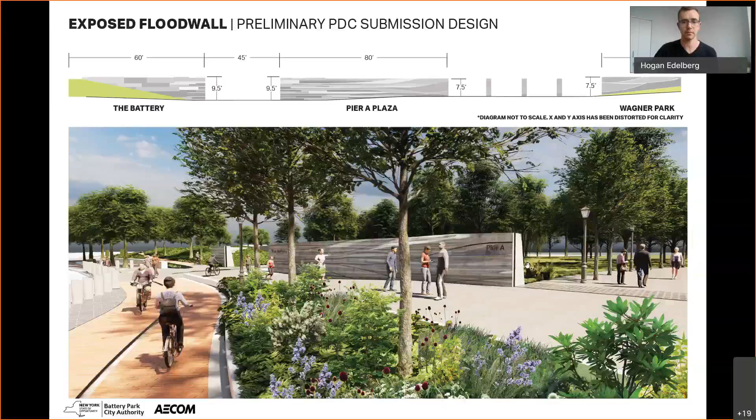The original concept is to take rougher and more textural and more building-block forms on the Battery side and weave that into a transition that expresses the change in place as you go from the Battery in the south to Wagner Park in the north. You can see in the image below how that starts to be expressed in a range of textures and colors and stone types to create something which is very interactive and helps to humanize this piece of flood infrastructure.

So looking at this area in plan, the flood wall is really an element that can serve to connect these three spaces, the Battery, Pier A Plaza, and Wagner Park. And as a design driver, this has been something that the team has been focused on for quite some time.

In plan overlaid with our current site plan, the flood wall is shown in blue. Areas where you see a dashed line, it is either buried or will be flush with the ground plane, as is in the case in Pier A Plaza, where we have flip gates. We're showing this again today to illustrate that it really is something that runs through every site in the southern part of the project.

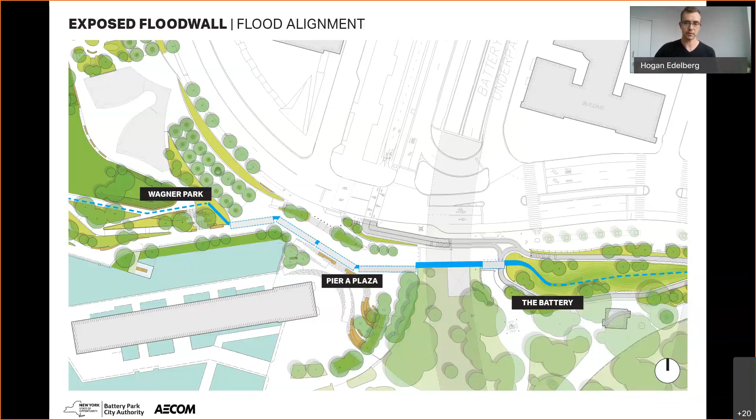The way that we can achieve this unification through the design is by looking at the cladding of the flood wall, which is what is going to be exposed, in the darker blue.

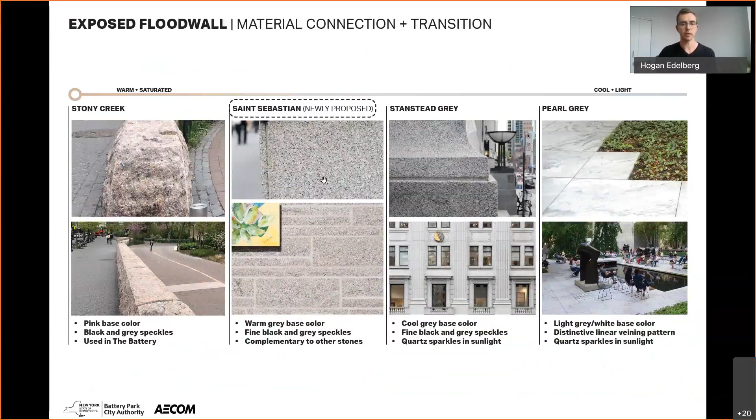Some of you have seen this before, but we have been looking at a palette of stone to clad the flood wall that relates both to the warm and saturated colors that exist in the Stony Creek stone in the Battery today, but also relate and are able to create a transition to the pearl gray, which will be used in Wagner Park in the proposed design.

We have some descriptions here of some of the qualities of these stones that we really are picking up on. The Stony Creek, which is prevalent in the Battery today, has this strong pink-based color and a mixture of black and gray speckles. It's used very widely in the Battery.

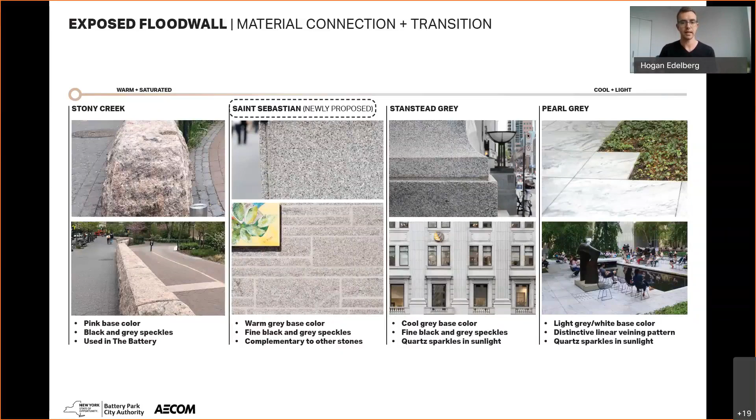A new stone we're considering as part of these two new concepts for the cladding of the flood wall is St. Sebastian, which is a granite that picks up both on the warm colors of the Stony Creek, but also starts to relate to the lighter and cooler tones you see in the Stanstead gray and the pearl gray as you travel north. So this gives us a palette going from warmer to cooler, from heavier to lighter, that we can use to articulate this piece of flood infrastructure and create the transition. I'll share in a second a couple of different ways we can achieve that.

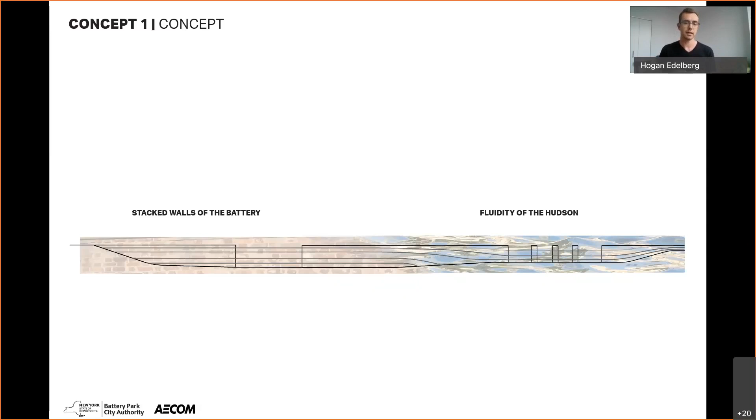How that may be applied to the wall: moving from left in the Battery to right in Wagner Park, you start to overlay this granular texture of the stacked stone walls and that roughness and color, and pull that over as a transition to Pier A Plaza, where you start to pick up a bit more on the more linear elements of movement and light that you can get in water.

So what we're talking about here is looking at a transition from the Stony Creek and the St. Sebastian on the left to the pearl gray on the right. The Stony Creek and St. Sebastian becomes our stacked stone, and the pearl gray becomes our Hudson River.

Before going into each section in detail, I'd like to show you the overall elevation of what this will look like as if you were standing along Battery Place and looking towards the water. On the left, we have the Battery berm, and don't worry, I'll zoom in and go through this in much more detail. The Battery berm is going to be concealed behind these street trees, and we have the Stony Creek granite in the foreground.

The Battery wall, just where my mouse is now, actually comes into the foreground as it emerges from the Battery berm, where we have the entrance more or less aligned with the memorial in the background. Then moving to the north, we have our largest section of exposed wall, directly over the Battery underpass, where we have a slope up to the raised Pier A Plaza. There we have new tree planting and our low walls in the foreground, creating a continuous security barrier to protect against any vehicular threats.

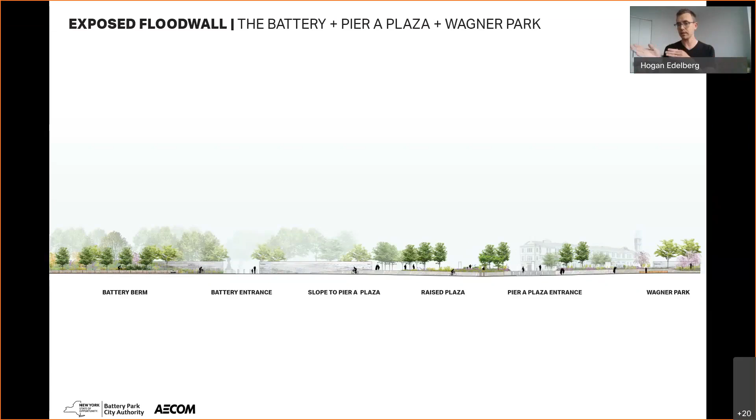In this first concept, what we're really seeing is this transition from the rougher split-faced stacked stone that speaks to the vernacular of the battery, moving from more rectilinear veneer pieces derived from the proportions of the existing Stony Creek blocks on site today, to more linear and fluid pieces of veneer cladding as we transition across the flood wall from the battery into Pier A.

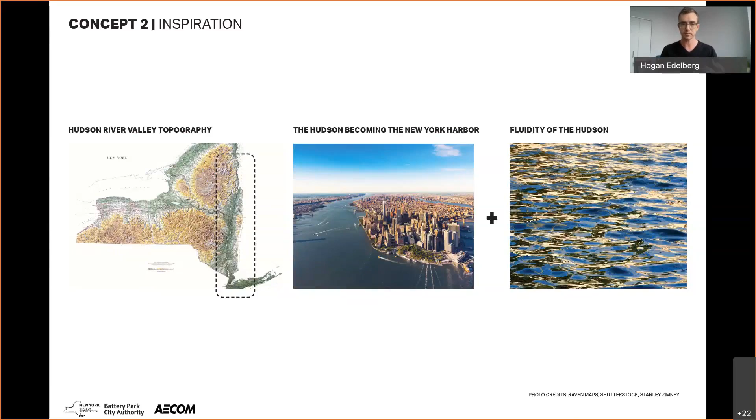We wanted to recognize the very strategic importance of the Battery and its location where the Hudson River really becomes a New York harbor. Reflecting its relationship with the Hudson River Valley and with water, we can start to imagine that this idea of topography in a map can actually be transcribed on the wall itself, creating a narrative and place-based storytelling as you view this wall, visit the Battery, or travel along the bikeway.

So what we've done in this concept is take the topography of the Hudson River Valley and assign different sequences to that, and assign stone types to these different elevations. We have warmer stones reflecting our higher elevations, down to lighter stones which reflect our lower elevations and also our water. In addition to telling this interesting story about the Battery, Manhattan, and the Hudson River Valley, it can also still achieve this idea of transition from rougher and warmer textures in the Battery to lighter and smoother textures in Wagner Park.

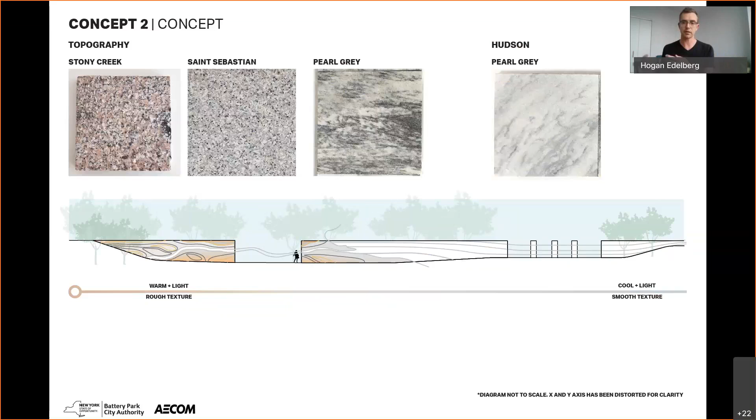So what does that start to look like in reality? We zoom in a little bit farther here too, but what that does is it makes the Battery wall, as it is exposed from the Battery berm, tell the story of the Hudson River Valley.

And as you cross the Battery entrance, this is transcribed on the Battery Pier A wall. We have the island of Manhattan located right here, and then the water flowing out into the New York harbor from this valley on the remainder of the wall.

Again, this is an idea of transition, and exactly where this happens on the wall can be adjusted. But it really strengthens that relationship to the Stony Creek granite blocks that are out there today by extending the horizontal idea of land across this wall, and in a way helps reflect the changing relationship of the Battery with water, especially salient because of the function of this wall at the end of the day.

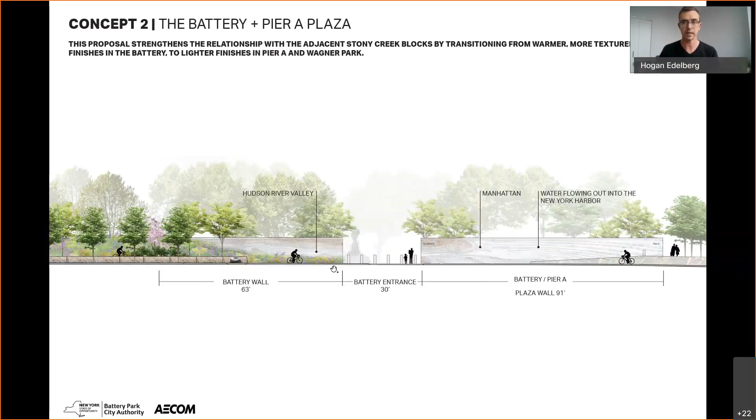So that would change our finish strategy a little bit, where we play up this idea of land as layers, using either CNC routed or water jet stone in a veneer pattern to apply this idea of topography to the wall on the left.

Moving over to the right, we still use extrusions to express the ripples, where we have the water flowing out of the Hudson River Valley. We can explore how to accentuate that texture and make this as dynamic as possible. Again, on the bottom, we have a key plan showing how that might be expressed on the wall itself. You can see very clearly how the Hudson River extends all the way through this.

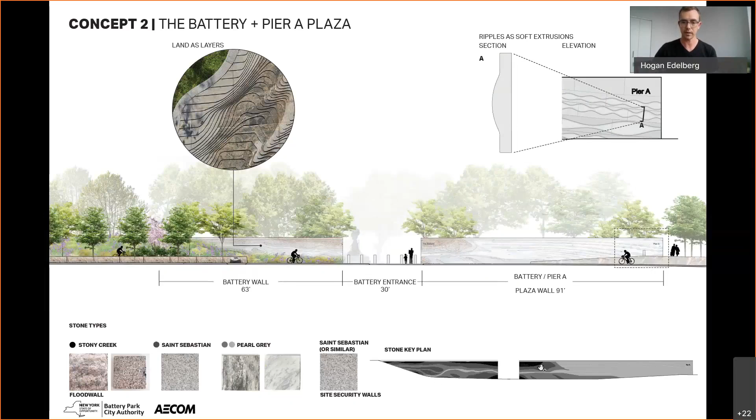Zooming in a little bit more, how does this stack up against the scale of the Stony Creek blocks and the scale of the Battery berm itself? This is a 63-foot section of the wall, which is going to be coming towards you as it emerges from the Battery berm.

You really do get something that can be interesting as you move along it, interesting as you look at it from across the street, but also interesting as you walk up to it. It can start to tell a story of the place that you're visiting, and also the function of this wall itself. This idea of the transition from land to water can be a helpful element to interpret the Battery and also this flood wall.

And what does that start to look like in perspective? It's something like this, where the gradient of warmer to cooler still happens from south to north, but also starts to happen from top to bottom and vice versa, where the idea of the Hudson River Valley extends all the way across the wall, even as it snakes into the background and dives into the battery berm.

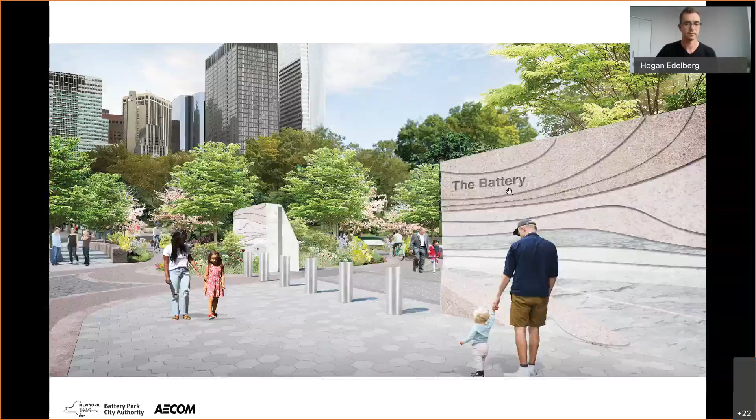And stepping back a little bit, the kind of tactile nature of this becomes even more apparent. And the warmth that comes from reflecting this idea of topography and land with Stony Creek or St. Sebastian is something that really catches your eye as you stand back and becomes something of a wayfinding element, and kind of a marker in place that helps define the entrance to the battery.

So you've seen some ideas for these columns before. We took a pass at these again just to ensure that the way these are being detailed achieves a couple of different things. One is that it really relates to this idea of movement and of water as we've expressed it in the kind of major pieces of the flood wall to the south. So we've articulated the horizontal jointing of these to create something that is a little bit more playful.

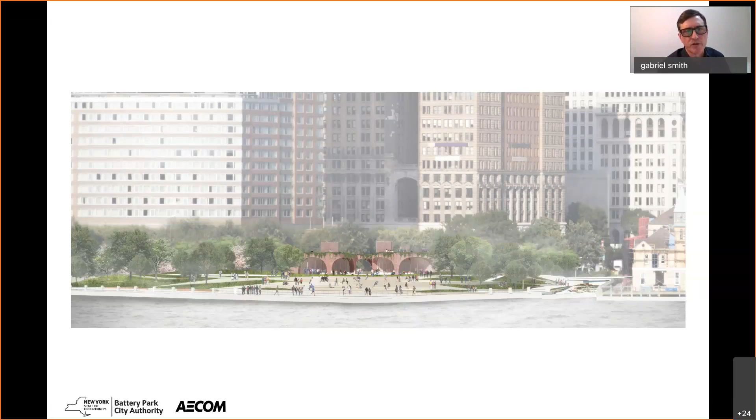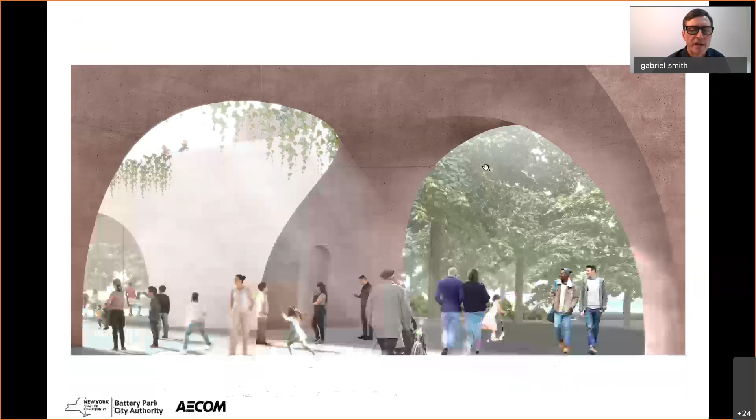I'm sorry, Gabriel, to interrupt you. Forgive me. Would you be able to, I think a lot of folks who weren't here to see the original presentation in January would really benefit, and even those of us who were, with a little more fleshing out of what exactly is going on in each of these areas, and maybe a little bit more time on each slide, because it's a lot to take in. Yeah, just a little more description of what we're looking at, the north roof deck and the south, and if you could incorporate the sustainable resiliency part of it. I assume that's part of this.

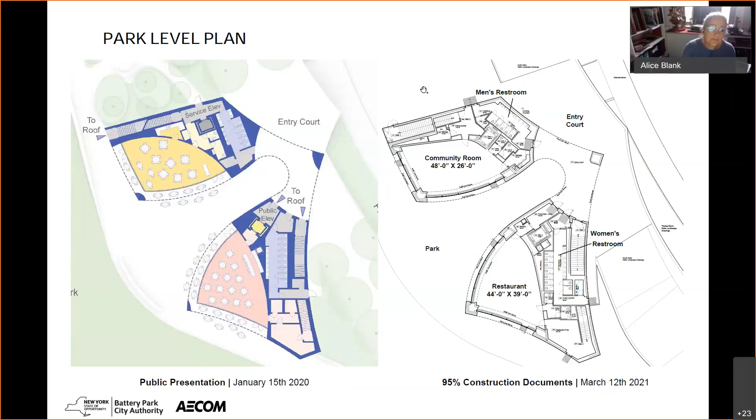Until the alignment is completed, the building needs to be flood-proofed, which we've done with some temporary removable stop logs on the service entry side in case of a flood. But we decided not to both take valuable service space needing direct access off Battery Place, and also to protect that equipment, by putting it up on the mezzanine.

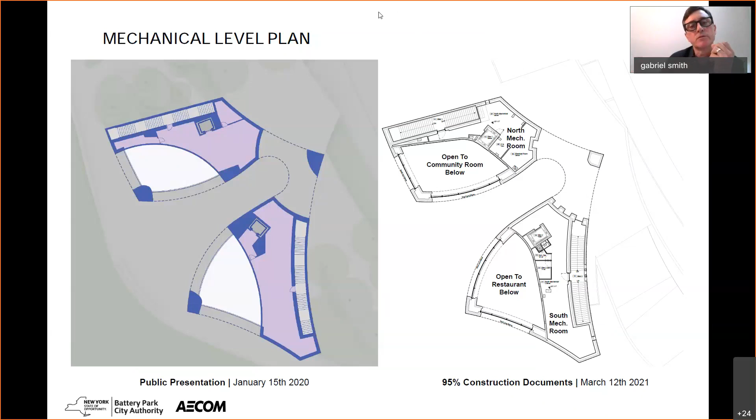So moving to the roof.

So I think we covered a lot of the features here. Again, this is the place where we have these renewables. The elevator overruns come up and allow public to move in and out of the building for events. There's obviously two stairs here that serve primarily for egress, but also gracious enough to serve for getting up and down as well.

Any questions about the roof? Could you just describe what the renewables are, and what are they doing for the building? How much of what is this? Could you just give us a little more?

I think I need to let AECOM weigh in on that more specifically, but what they are doing is trying to offset one of the big energy consumers, which is hot water for the restaurant. Obviously, we're working closely with Battery Park City Authority on the tenant guidelines for that operation. But one of the big things that we found challenging is just the amount of hot water being generated for their operations as we project out with our food service consultant.

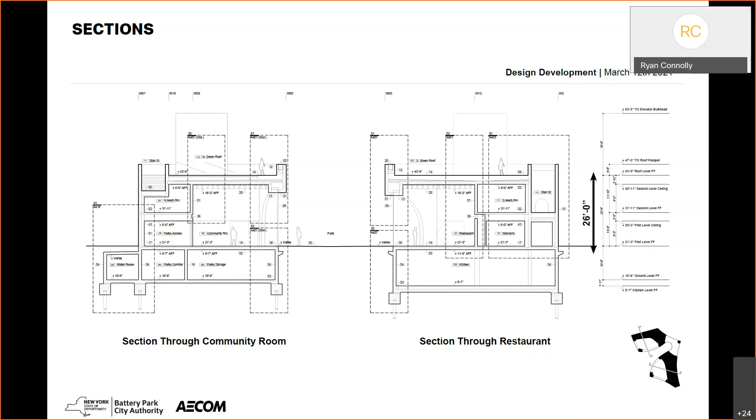use of a double wall system that allows us to have a continuous thermal envelope to help mitigate any potential thermal bridging and to create a continuous, tight seal to the exterior. We're using this Thermomass system, which allows you to pour an outer concrete wall with the insulation and vapor barrier, and then an inner structural concrete wall.

So one of the things I think is exciting about this is the way in which it really elevates the ability for this building to be long-term high performance and have a life cycle that's maybe much longer than the normal building. So, I think unfortunately one of the things we discovered when we did a survey of the existing building is that it's really suffered with the marine environment that it's in. And so what this Thermomass system does, and it's kind of a product that's very unique, it actually encapsulates the insulation.

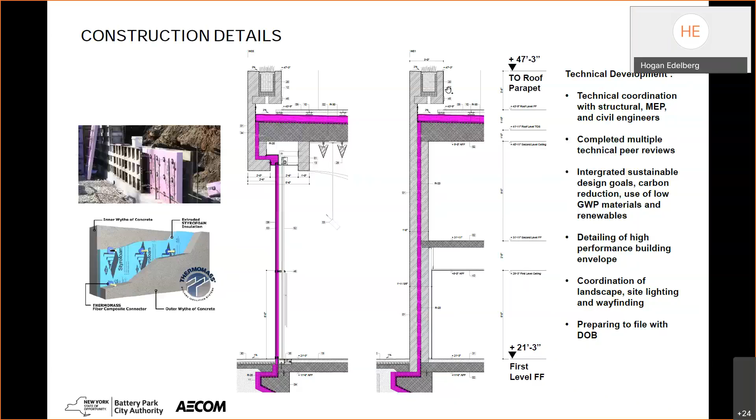Gabe, I switched back to the details slide because I heard you were still talking to it, but we can. Yeah, if you don't mind advancing and just letting me know where you are, I can kind of pick it up from there.

Okay, so just before you move on, a couple of quick things to make sure it's clear. There was a reference to a basement, but there is no basement on the project. I believe, Ryan, you were referring to the street level. Because we've essentially raised up the park and slid the building underneath it, that's actually our street level, our public level, and is the lawn level. So in terms of terminology, ground is actually lawn level, which is the public level, and then the street level is the back of house level.

Gabe also made reference to the deployable floodproofing at the entrance, and that's not protecting against these big storm events, which is what the primary flood wall is doing. It's more of a tertiary level protective measure against any sheet water flow on the streets. Our coastal modeling has shown we're not going to be experiencing that around Battery Place, but we have a protective backup measure in preparation for very large storm events, just to make sure we're protecting the entrance to the back of house areas at street level.

Thanks, Gabe. Sure. Okay, so Hogan, if you don't mind advancing to the site plan that's part of this accessibility discussion. Sure.

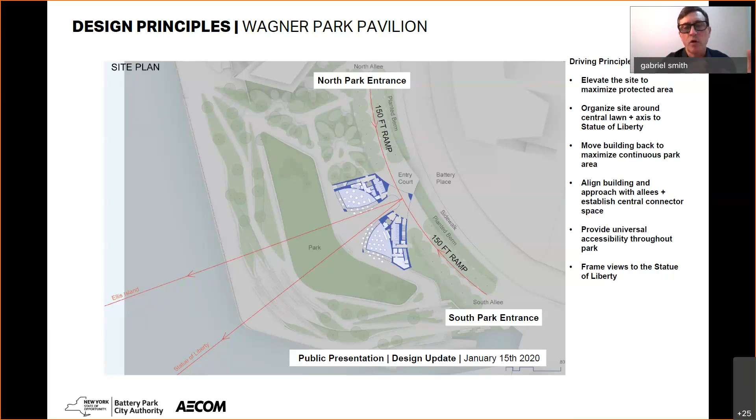Obviously maximizing the protected recreational area is important, organizing the site around this lawn and central axis with these incredible views, which you have now, and we absolutely want to preserve that legacy from the original design. Aligning the building with the approach to the park and these allees being elevated is all part of both weaving the legacy of the project and trying to get as close to the spirit of universal access as we can possibly get. That's really what we've been doing the whole time with the building in its different iterations.

Okay, next. So taking a step back, look at one of the earliest designs here. This was a public presentation that really was, for us, a watershed moment because it really unlocked our responsibility to try to deal with universal access.

In this scheme, we had a grand stair that went from Battery Place up into the park, where you then got great views to the river. This had an elevator on each allee that served the park level - one was for the restaurant and one was a public elevator that got you up so you could circumvent the stairs if you needed.

One of the important feedbacks we got in that meeting was, hey, this isn't really universally accessible - it sort of relegates people who are in a wheelchair or mobility impaired to use these elevators. Specifically, there was discussion about a ramp, and also a lot of discussion about the current stock of elevators and how maintenance has been difficult. So we took that away, and you can go to the next slide.

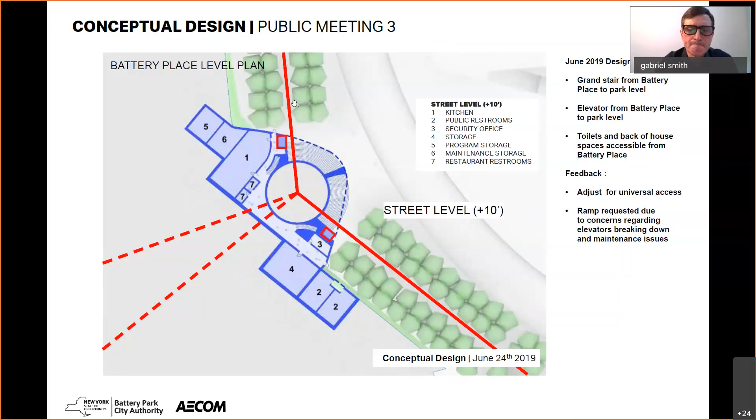So if you could go to the current plan, I'll try to talk through the design update of January 15th, 2020, and some important things that happened once that berm got — once the ramps got sloped along the berm.

At this point in the design, all the toilets and public spaces were relocated to the lawn level, and the back of house spaces were all at the Battery Place level. We eliminated the isolated elevator lobby at Battery Place, so there weren't any blind conditions that might be dangerous. We reviewed the universal access with the Mayor's Office for People with Disabilities, who determined that the ramping was in fact a good solution, providing universal access, and that the third elevator wasn't needed at that time.

It's important to say that when you read through the ADA, it's not just what they're saying you can do, it's also what they're saying you must do. In the case of ADAAG, what they're saying is that universally accessible routes have to be connected with the more common path of travel.

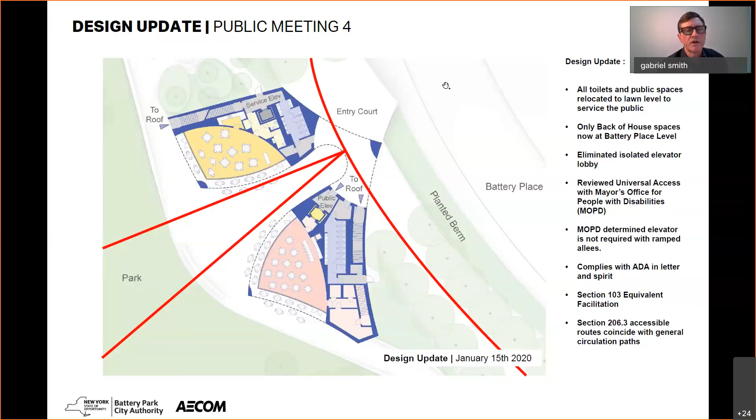So what we did in response to that was we actually studied a couple of different options. Hogan, I'm going to trouble you to go to the plan, because I believe the lower level plan of this really is just a description of what I've already gone through. But I'd like for you to go to the plan where we've overlaid two possible ways to access the existing elevators.

This is Gwen Dawson. Can you hear me? Yeah.

I just wanted to add that, as we've said before, our team has designed according to the ADA and all regulatory requirements for accessibility, and have come to a solution to a number of different conflicting sets of conditions and issues that do meet all requirements and provide a beautiful access point that's fully accessible at both ends of the park.

And what they're about to show you now is not in the way of current options. It's to show what the obstacles are and the conflicts are, and why the authority, with the aid of our design team, have come to the conclusions regarding the design and the accessibility measures for the design. So I'll let them go through this with you.

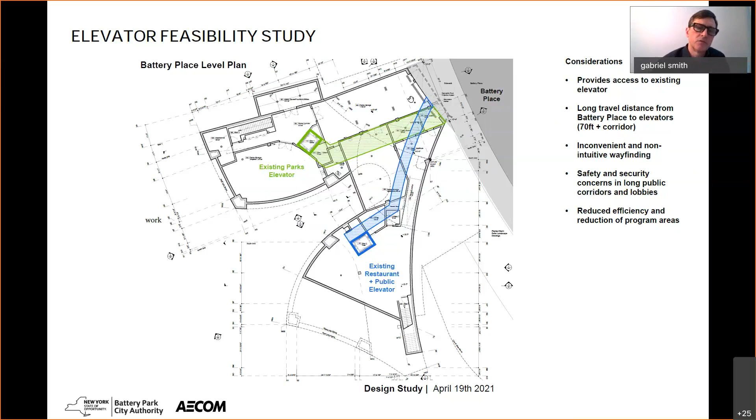So we have another study, and we can talk about these. I just want to go through them before we get into discussion. The other study, Hudson, if you could go to your drawing that you created. Yeah, I have these up.

The other options we looked at were one or more of these: to put a site elevator out near the berm, which would be highly visible on Battery Place. It would have minimal impact on the internal planning of the pavilion, and would probably eliminate most of the safety concerns that you have.

You would still have some concerns that you would normally find with a public elevator everywhere, and they're all over the city, including several at Battery Park City Authority. So the cons are additional cost and some increased operation and maintenance concerns.

We wanted to study these as well because they're more intuitive in terms of what you're trying to achieve and what we talked about in February about increasing accessibility to the park. So those are the studies we did, and we want to open it up to conversation about what the pros and cons are here.

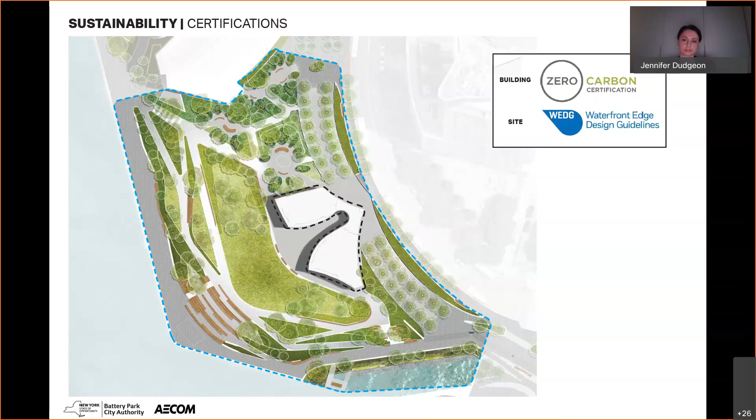I'll talk a lot more about that in the following slides, but while the ILFI is well known for its meaningful and rigorous sustainability certifications, like you may have heard of Living Building Challenge, ILFI zero carbon is actually the first performance-based carbon standard of its kind, and we are really excited that this project has the opportunity to be an early adopter and really help push the industry forward. So while there are several site and building sustainability certifications out there, these two were chosen after a lot of review, primarily because of their close alignment with BPCA's sustainability plan.

Next slide, please. Just zooming out for a moment, it's important to note how sustainability is really at the core program and design of this entire project, and that the Pavilion building is very much integrated in this site through its sustainability goals and features. So the building, as I mentioned, will be a net zero carbon building.

Achieving zero carbon is really the culmination of many building strategies, starting with energy efficiency. An example of that is we've implemented geothermal or ground source heat pump technology. We're also removing on-site natural gas consumption and using low carbon materials in construction, and then finally offsetting the remainder of any of the building's actual carbon footprint.

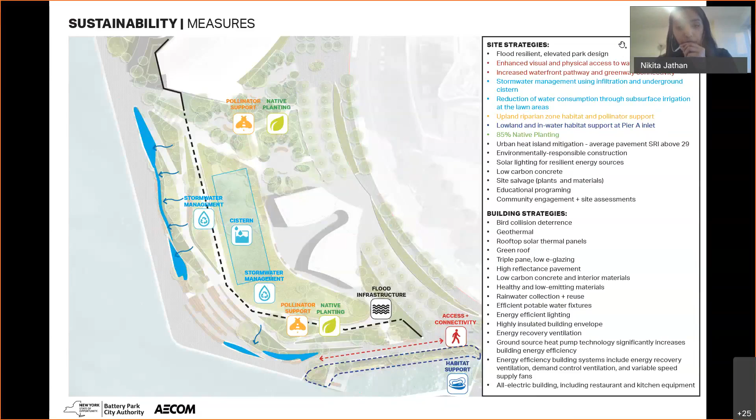Next slide, please. The building is also really inherently connected to its surrounding site. It's really a resilient site and landscape design that is managing stormwater, is flood resilient, collects rainwater for reuse, and conserves potable water use. And this is all really tied into the building's sustainability as well.

The site's attention to ecology and really an accessible, functional, and comfortable open outdoor space designed with attention to both rising sea levels and also rising temperatures is also, of course, key here. And again, very much connected to the building's intended programming, educational programming, and sustainability story.

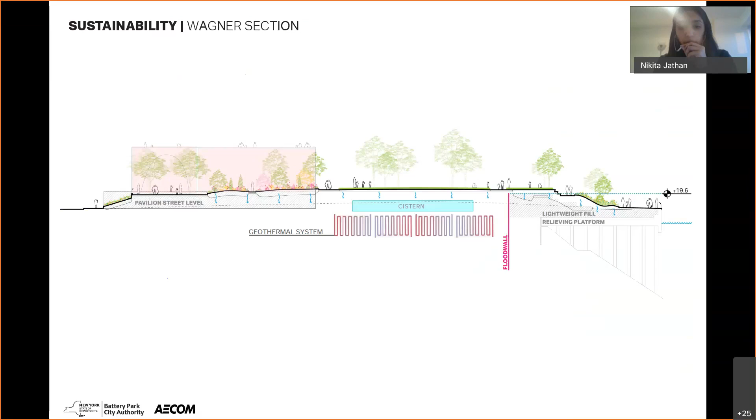Next slide, please. So the building's ILFI zero carbon certification was identified by our group as the most meaningful way to approach BPCA's commitment to a low carbon future, because it really addresses what can be thought of as both halves of the carbon picture of the building. So I'll talk a little bit about what that means.

First, it works to make the building as efficient as possible operationally and just simply use less energy. This is achieved through a variety of both passive and active design strategies. It's currently surpassing ILFI's 25% reduction target to an anticipated 38% reduction. And while this building is outside of the scope of carbon emissions legislation like New York City's Local Law 97, this reduction target puts the building in line with what that kind of legislation might require.

And in fact, it goes even further by actually offsetting all of the energy that will be used by the building. The other extremely important side of the carbon picture that's often left out is embodied carbon. ILFI zero carbon requires that the building document the embodied carbon of the whole building's elements, reduce that embodied carbon, and then offset it. So at this time, the project is far exceeding that requirement of 10% and is actually anticipating about a 37% reduction. And I'll go into a little bit more detail on that on the next slide.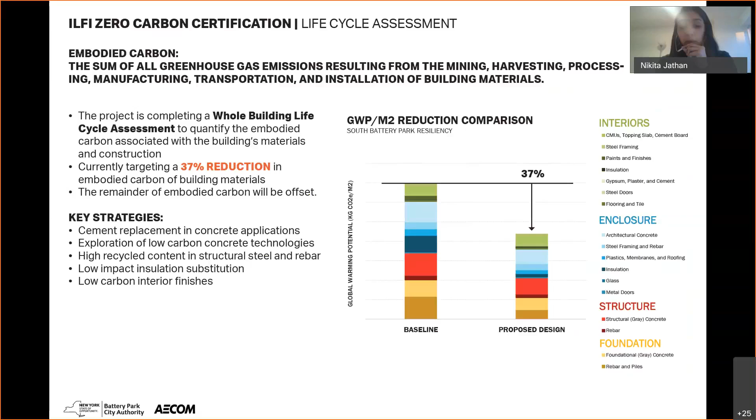We're replacing cement throughout concrete applications and using low carbon concrete, using high recycled content materials throughout, again, the building and the site, and using lower impact insulation materials, which can typically have some really harmful global warming potential. Next slide, please.

So I just want to end on this graphic. There's a lot in here, but this graphic really helps convey the holistic sustainability approach of the building. To get to a net zero building doesn't just take one or two strategies, but really a strategic approach across the entire design that balances all building goals.

So in addition to the carbon strategies I discussed in a little bit of detail, the building is really addressing best practices across the board, whether that's water conservation, sustainable site design, healthier materials, renewables, envelope design, and so on. Maybe just to conclude, I'll highlight a few examples of where I think you really see these synergistic strategies.

When you look at the interior spaces, daylight analysis has actually informed the design of these spaces to include things like operable shading and low emissivity glazing. All of this minimizes glare and solar heat gain while protecting valuable views, embracing daylight, and using less energy for lighting, helping us get to that zero carbon goal.

The building's systems use a whole variety of energy efficiency measures to use less energy. There's a whole laundry list of them. In particular, I want to highlight that there's a geothermal field below grade that will save a huge amount of energy for the building.

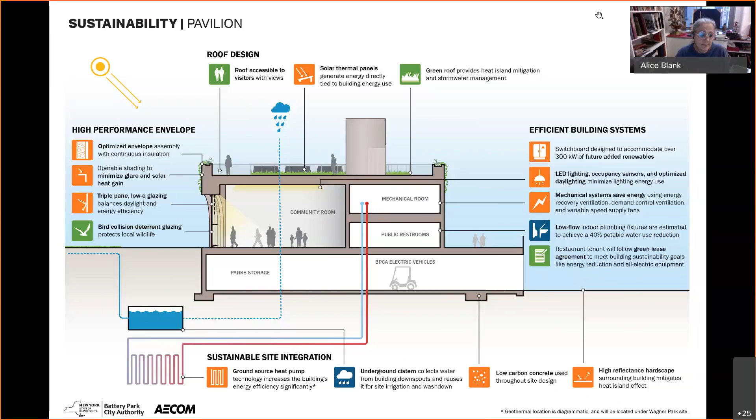I think that's the end of the presentation, Alice. Great, thanks very much, Gwen, and all the team. That's very helpful to hear from you.

So it's a good time to open it up for questions. What are we at, 7:30? This is the only thing on our agenda, so I hope everyone gets a chance to get whatever questions they may have answered and the clarity they need. Gwen, could you give us a little overview as to the timing on this project? What are the next steps in the approval process? If we could, what comes next here?

Yeah, I'm actually going to let Jenny answer that question because she's got all of those dates committed to memory, and I don't. Okay, great, thanks, Jenny.

Just make sure I'm unmuted. Can everyone hear me? Yes.

Yeah, so important just to qualify, for the Pavilion, Wagner Park, and the Museum of Jewish Heritage, they will be in construction, well, two construction packages actually, following a separate timeline to Pier A Plaza and the Battery. So very quickly, we're at 95% for the Pavilion, Wagner Park, and the Museum of Jewish Heritage areas.

We're looking at being at 100% for those documents in June. And looking at this stage, based on our EIS development, starting construction on those packages in early 2022.

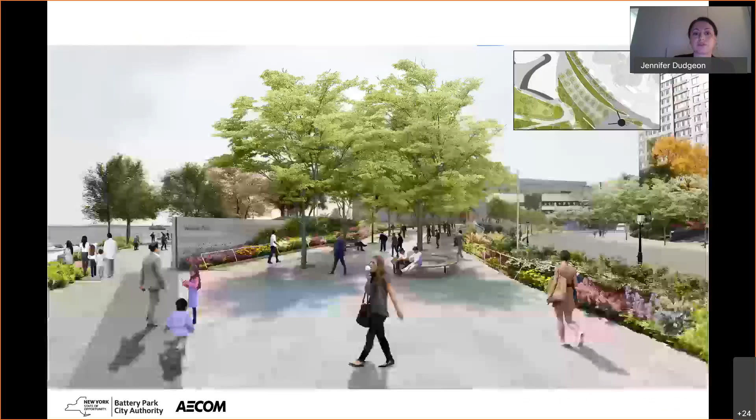This one here — we can see that essentially the knee wall on the left-hand side, as part of our physical site security barrier to stop vehicles, is framing up the bottom of the Wagner berm. So the alleys are ramping up on the left-hand side. This is essentially the experience you have on the street. As you move down Battery Place, you see the exposed section of stone wall as the ramp rises up to the lawn height and then tapers back down again.

The landscape team has worked to create a lot of visual interest in the planting palette along the extent of that. But it's important to note that this image will be part of the PDC submission, but really is just subject to the area to the right of that stone wall.

Thanks, Jennifer, that's helpful. That means there'll be no change, or they can't input on the plantings part — they're just talking about the stone wall part, is that right? They're actually just talking about the footpath. The stone wall is part of BPC land.

Okay, so I guess we're going to open this up to questions. We might be best to follow the way the presentations were provided, in terms of the flood wall, the columns, the Wagner Park Pavilion and such — but I don't think it really matters, and everyone will chime in with their expertise. So I open it up to the committee first for questions and comments.

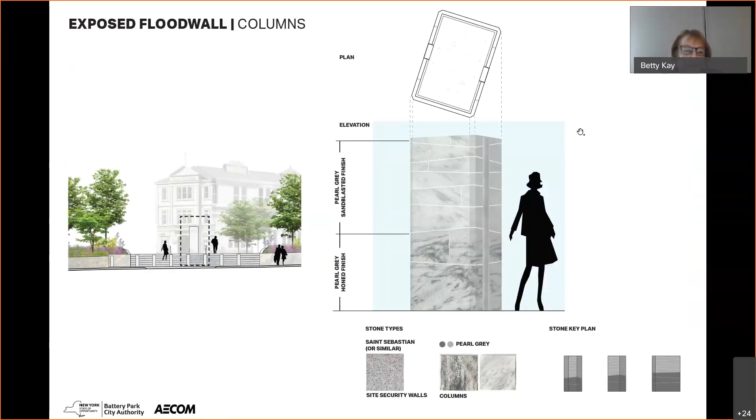Yes, thanks. I am a scooter user and I noticed a lot of stairs here. So if you could tell me a little more about this entrance, because obviously there are a lot of people with strollers and other things besides wheelchairs — how do they enter here? Sure. Hogan, do we have the plan view in this deck?

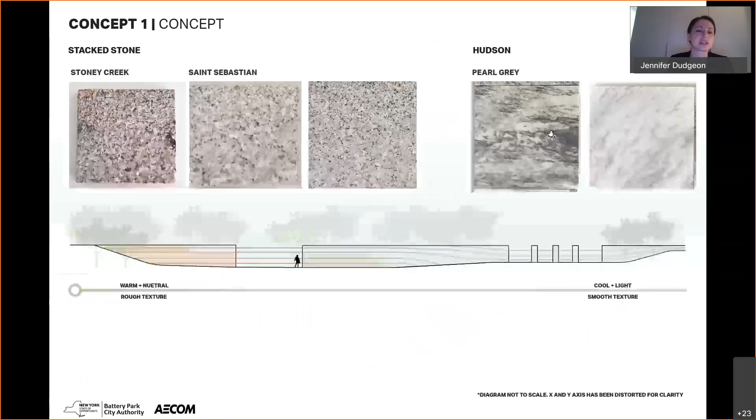So I'm just flipping back to see if we do. Yeah, so Betty Kay, we presented in more detail on Pier A Plaza at the last meeting on February 22nd, and there were plans that actually showed how we were dealing with accessibility.

This particular deck was really about the stone cladding of the flood wall. Maybe it's worth, we certainly send you a link to that past presentation. But maybe if we have enough time while we're talking about some other things, we can get that plan and that rendering to put on the screen.

And that's fine, sure. And I'd also just like to note, while we look for it, in this elevation that you can see from the street, the stairs are here in the center. Just to the left and just to the right are ramps as well, and they bring you to the same place that the stairs do.

Yeah, so I'll pull up a plan as well, but just we have that for now. Actually, can I just say, as a user, there need to be signs by the stairs because everyone gets dropped off there, and I'm used to going by myself. I can't go with anybody else in my group, but if there's at least signs so I know where to go, that would be helpful by stairs, and they could just be on the wall on either side.

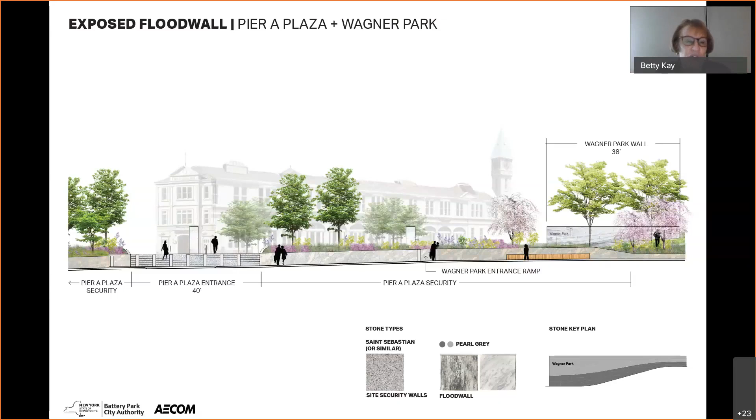Discreet. Sure, actually we did include a wayfinding plan, Hogan. I think it's at the beginning of the pavilion section. This one here, really difficult to read for you as well, Betty Kay, because it's zoomed right out. But I think what this plan was identifying, as we talked about in more detail last time, was that our primary arrival points to this project site are at the 9A intersection, and then also at the Museum of Jewish Heritage.

So when we're looking at how we're addressing wayfinding and understanding vehicular arrival, pedestrian arrival, and also public transport arrival, when you cross that intersection at 9A, there is actually going to be the Battery Park City wayfinding package, which is being constructed and installed at the moment, and we've continued the strategy for the wayfinding signage package into Wagner Park, Pier A Plaza. So you will be greeted with a pylon map at those two critical arrival points, which will help to orient you as to where to go.

Then they are supplemented with pole-mounted wayfinding signs as well, which will help with some additional directional guidance. So we've looked quite closely at that in tandem with our wayfinding consultants, and also in the context of the battery wayfinding system, because they do need to complement each other. And then the AECOM design team worked hard to make sure that intuitively a lot of the landscape features help guide you in the direction that the signage was leading you as well. So if we pull that plan up by the end of the meeting, it'd be good to quickly talk you through that flow again.

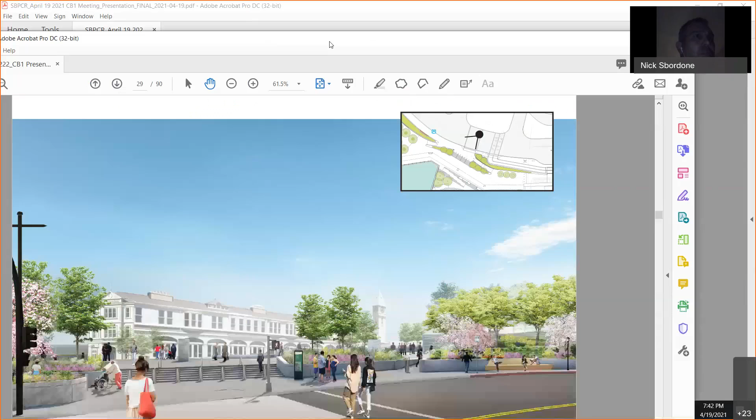Oh, here's a rendering. So here, Betty, go. This is the view. You're on the north side of Battery Place, crossing the 9A intersection. That is the set of stairs immediately in front of you that takes you up.

There is a similar one on the left as well. You can see the person with the wheelchair that then takes you up to the left side, up to the plaza as well. So both of those are flanking the immediate sides of the stairs.

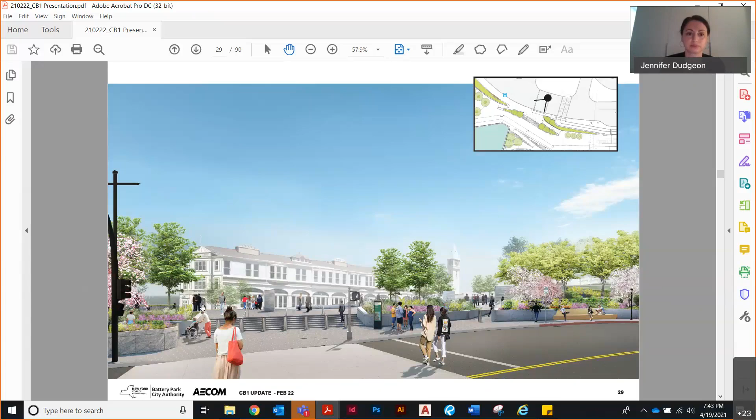Okay, thank you. So let's move on, on the exposed flood wall and the columns, do we have questions? I see Bob Schneck. Okay.

Sure. I just wanted to say that at the beginning of this meeting, Alice pointed out that CB1 has passed a number of resolutions. And as we pass those resolutions, often in meetings, people say, oh, I'll get back to you on that. Some of the questions we've asked over time are really important questions. Has anyone ever made a checklist of all the kinds of items in those resolutions and how they're resolved, and coming back to our meetings and talking about how each one is resolved?

In particular, three things hit me right off the top of my head. I was worried about skateboards, for example. Lots of times, wherever there's a serious incline, skateboards are going to find them and use them. And now people tend to use all kinds of electric vehicles, scooters and things everywhere on the sidewalk. And so now we have these very long ramps. In earlier meetings, people said they were going to consider those kinds of dangers on these ramps and how those vehicles would be accommodated. No reference to anything like that.

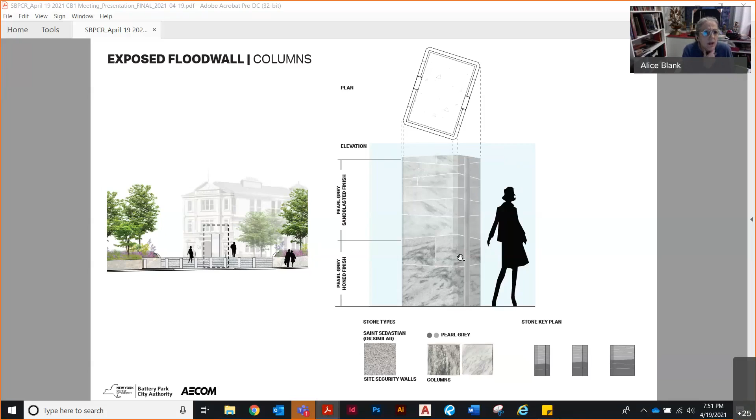I just want to add to Bob's questions about the bike situation. That came up many times — the idea of having a separate bike lane. Could you use the street? I'm not sure we heard about that tonight. Could you respond to where the bikes are going?

Let me provide an update. We had talked before about the prospect of a bike lane on Battery Place. We've had conversations with DOT, and they're willing to work with us if it's something the community supports for a bike lane on Battery Place. The proviso we were presented with was that it wouldn't just be that area — if they approved a bike lane for Battery Place, it would need to go all the way up to West Thames. There would be potential parking impacts.

And so we are certainly, as the authority, very willing to work with the community and with City DOT on trying to evaluate the prospect of a bike lane for Battery Place.

Well, that's great to hear, Gwen. Maybe we could arrange for something at the next meeting, this would of course be Betty Kay's domain. Let's talk about it, because I think it's an interesting concept, and it's all connected, bottom line.

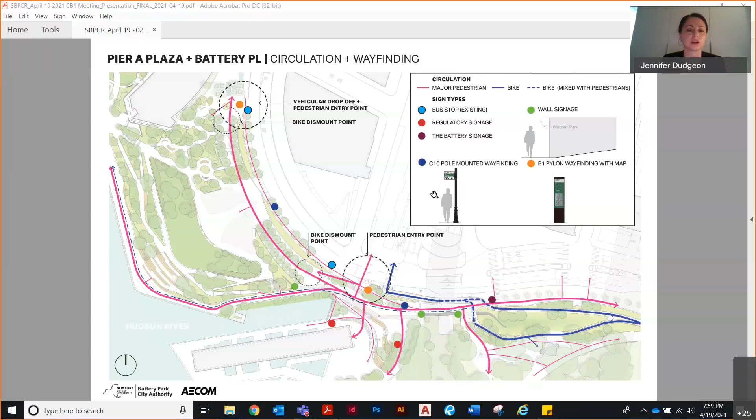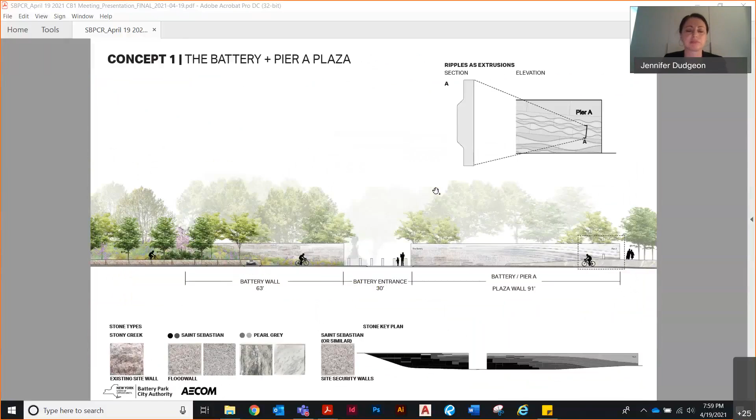Yeah, and maybe the overall elevation. I know this is a bit hard to... Okay, actually the plan, I'm sorry, I'm going to jump around, get you guys seasick. The plan that's actually showing Pier A Plaza with the walls in blue, that might be helpful.

So just recapping, essentially the flood barrier is the premise for this project. We've located this wall, and we've designed this wall, working with this community as well over the last couple of years, to address a 2050 1-in-100 year storm event. And what that means, when we've done extensive coastal modeling, is that for a storm of that type, the height of the water is going to get to roughly 18 feet in areas like Pier A Plaza, 18 feet above sea level.

You would have heard us use the term 'height of intervention,' so that's the height of the wall above grade. In a place like Pier A Plaza, for instance, where grade is around 6 or 7 feet, that ends up being like an 11 to 14-foot tall wall, depending on where you are.

So we certainly, as one of the primary design drivers through this whole process, have been very protective about public space, about making sure that we're not blocking access to public space and the experience of public space. And hence throughout the alignment, ranging from the museum all the way through to Wagner Park, across Pier A Plaza and into the Battery, it's always been about trying to minimize the exposure of that wall and maximize access to space.

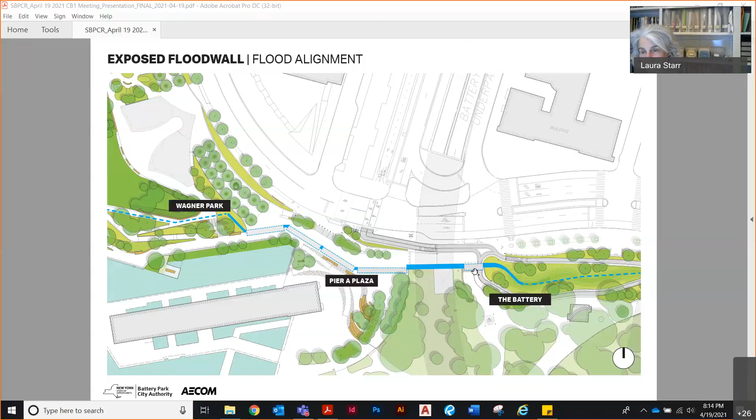Alice, I can't seem to raise my hand. This is Wendy, so you can come back to me later. No, go ahead, Wendy. Go right ahead, don't worry about that tonight.

I had a question about the wall, since you gave us the two renderings. The St. Sebastian granite, is that a special type of granite? Does it come from the Northeast? Where do you get it from? Is it just the color that meant something to you, or do any of these things come from New York State? I know it's a specific question, but I have more questions about the wall. The St. Sebastian just kept popping out as a very specific granite. Is it as specific as I was hearing?

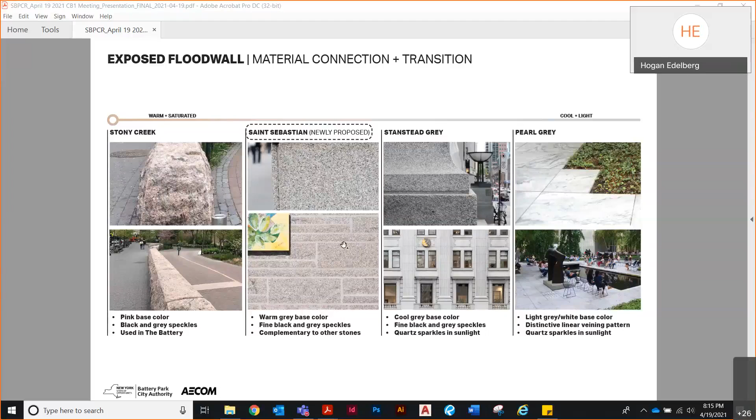This is a specific granite that we've located in quarries in the Northeast that is available in the quantities necessary for this project. It comes from the same quarries that the Stanstead Grey and the Pearl Grey stones do. I don't know the exact location of the quarry offhand, I apologize, but it is something we selected with availability and regional sourcing in mind.

Yeah, it's abundant and cheap.

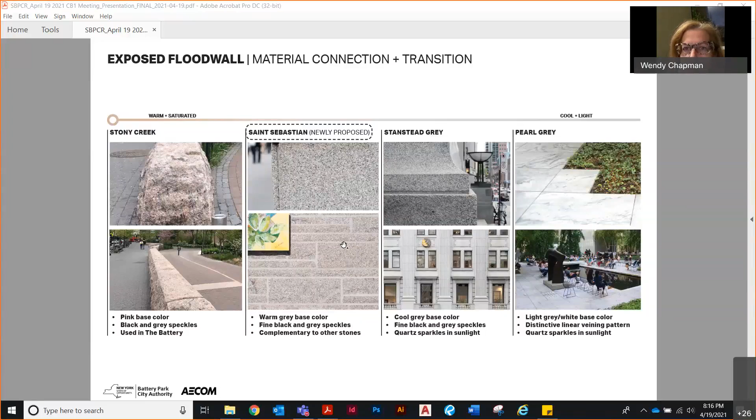Okay, well that sounds fine. I wanted to ask, I certainly prefer the idea of having something more specific with the map, the second version, which Warrie Price told us at one point - if you're going to show up and there's a wall there, she'd like it to be something a little more meaningful. It still seems very abstract, right? Is it going to actually say this is Manhattan and this is the Hudson, or is it just an abstract of it? It's not really a map, right? It's more of an essence of a map. Is that what I'm seeing?

That's correct. Yeah, that's correct.

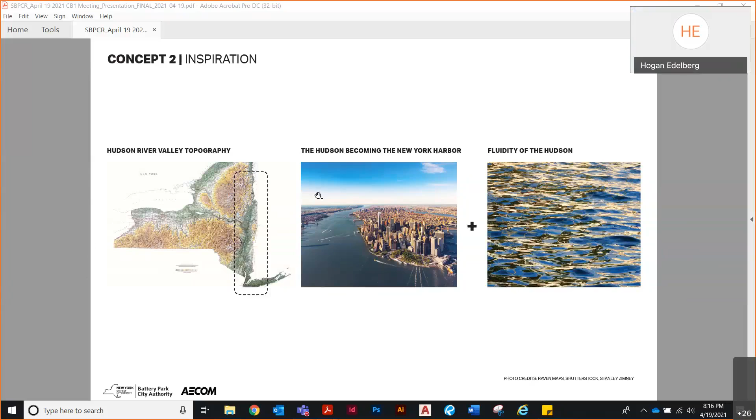Okay, so it's more abstract. I know that being blatant with maps is kind of out of style right now. I hope somewhere in the park there are more specific places where we can talk about the amazing topography and history. If that's not the place, maybe something else. How about - I think it's pretty...

In terms of the bike path currently, I just wanted to go back to that concept, and I know it's not our committee, but I think it's really important to note that the bike path as it is right now is so attractive that so many people walk on it, and it causes problems for the bikes. That's a separate issue for other committees to talk about later on.

And if I can indulge everyone a little longer on a slightly different topic - we didn't see an image of what the access of the garage door coming into the new facility looks like now, right? We didn't see the new one. Yeah, we did actually.

Perhaps Hogan, could you jump back to that page? We did skip over it, the detail of it. It was presented also on February 22nd. So if we could.

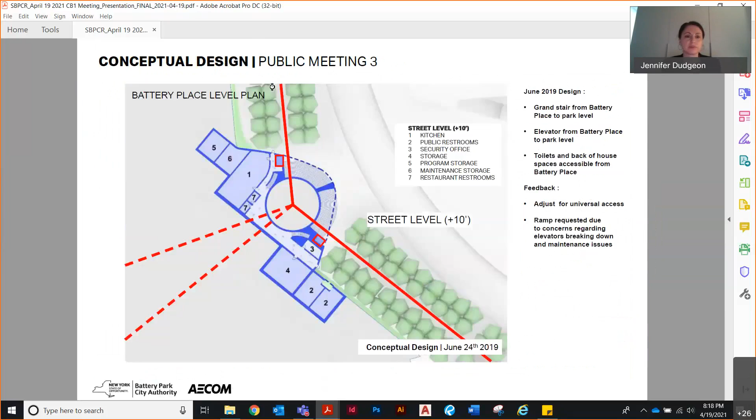Because you guys are showing this, but it's a lot coming very fast. Yes, no, it's a lot of information. We'll bring it up for you. See, now it's on the screen. It's hard to understand what I'm looking at. I don't see the plants. I don't see - that's not a street view. And listen, I'm struggling to...

No, you're absolutely right. And I will say that we had asked for architectural plans - first of all, we've gotten a few - and we had asked for perspectives of this particular location because it was so controversial, since you're looking into a service entrance from a city street and all the rest.

But that is the same, as you point out, that we saw the last time. It's quite tiny and very difficult to assess what it's really going to look like. I quite think frankly, that's a fair criticism. Yeah, if that's it, we can do better than that. Even if it's a service entrance, you can do better than that. That is not worthy of the spot. I don't know what it should be, but agreed 100%.

I am still so frustrated with this building, and I'm so excited about all the environmental parts of it, the cistern. There are so many great things, but the building itself is still missing something.

This is going to be a building that when we show up, I'm going to be frustrated. I understand you're 95% done, but I just want to say as a member, I feel like there has been a fail on this building, and it's close, but no cigar. This slide right now is a perfect example. It's not good enough. I don't know what it should be. I'm not a landscape architect or an architect, but I can tell you this is not good.

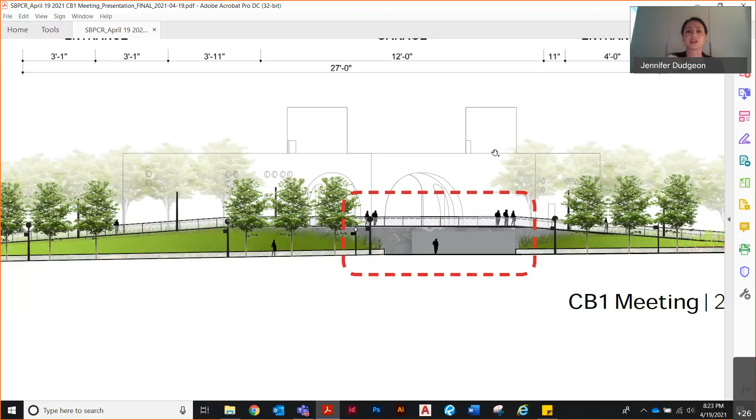If you pan up a little bit, Hogan. We were really trying to create a flush look with the doors, so in a metal finish that would blend with the stone and have it sit flush with the outer edge of the stone as well. So we tried to avoid a look that felt like a garage door. It just felt like a series of panels that blended in with the stone that were actually operable, so it should read like an element of the landscape.

I didn't tell you if it's going to look like the picture - it does not. You're not accomplishing what you're saying you're trying to. Could you put the stone facade stuff, or some facsimile of it, because you probably can't put stone on the doors and make it blend in, or come up with something that makes it blend in, because it really looks like garbage.

Yeah, we can take another look at that. If the intent is to really blend that out so we don't see the doors, we can work harder at the detailing. I get it's supposed to be the back door and back entrance, what people aren't going to see, but this is what the hotel is looking at, and what people driving into Battery Park City see as they come around that corner. This is our welcome into our community from that end.

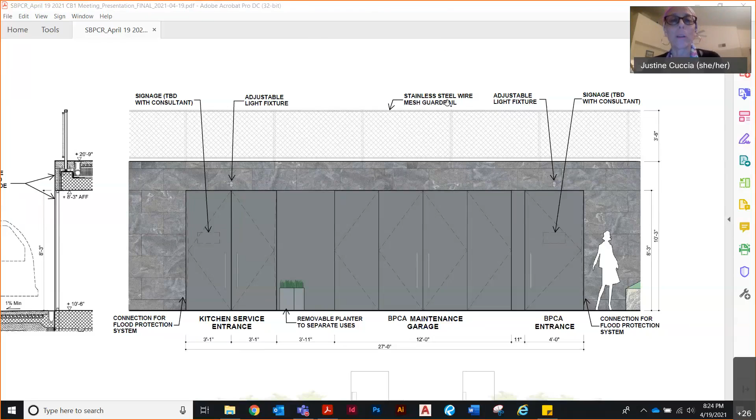This is not acceptable, and I'm looking to you because I know you guys can do better. We've made this point for many months and it hasn't been answered. We haven't seen the drawings we asked for, or any change to this. If there's room for more, the community has asked for that, and the points are valid - it's not just the back end of a building, it fronts a city street, and was once the view onto the harbor. It's critical that it gets done beautifully, and I guess folks aren't yet convinced about what it really will be. Maybe you can offer more detail or thought on it.

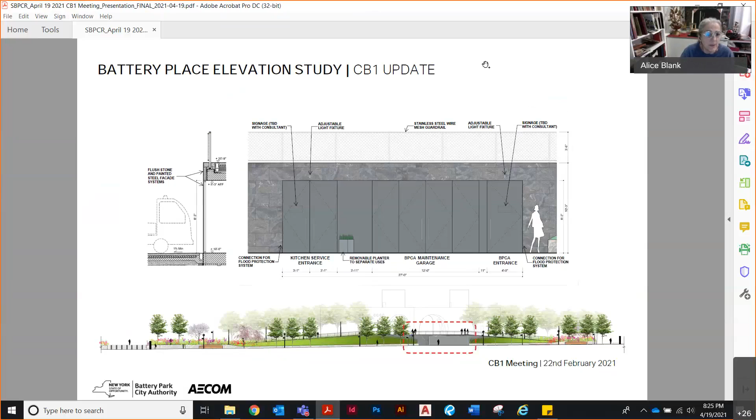I'll just say that stainless steel mesh guardrail going up and down all 150 or 300 feet of the ramp - I'm not sure I understand the choice, but I'm sure there's a reason for it. It does seem a little aggressive. We haven't discussed any of the details or materials of the pavilion, and that kind of guardrail is tremendously impactful on this project. You're not looking at a ramp where you're just walking up and down with some trees - you're walking up and down looking at that stainless steel mesh, which is shown here as very open.

Am I wrong? Is that open or closed? Is it a stainless steel mesh the whole way? It's the stainless steel woven mesh - yeah, it's the whole way. It's not showing here.

We are recommending this product specifically because of its openness - it has the qualities to allow a line of sight through it with limited obstruction. There are a lot of different guardrail products out there, but this is a woven expanded mesh that can be attached to the guardrail, which is necessary. We want it to be as open as possible, so that's something we did consider very closely.

I'm sure, yeah, it's not an easy problem. I'm sorry to interrupt again, but can we go back to the elevator as well?

Yeah, go ahead, sorry I interrupted Wendy. Go ahead Wendy. I apologize, I want Jen to answer if she needs to, but the idea of bringing this elevator back into the concept and maybe that can somehow hide - I know you have to have these little electric vehicles and cars going in and out of there - but I think there has to be something visually more interesting.

I agree with Alice that we want to make this park completely accessible to all people with all abilities. Even though it's ADA compliant - and I was one of the people who brought that up at the first meeting probably 2.5 years ago, because I spend a lot of time with Battery Park seniors - I think it would have been stressful for me to push my friend who recently died up the wheelchair ramp all that way. I would have much preferred coming up on the street flat and taking her up on the elevator to that level so we could enjoy it. Pushing my friend up the wheelchair ramp from one end to the other - I don't know if I would go to this park. So just back to Alice's point.

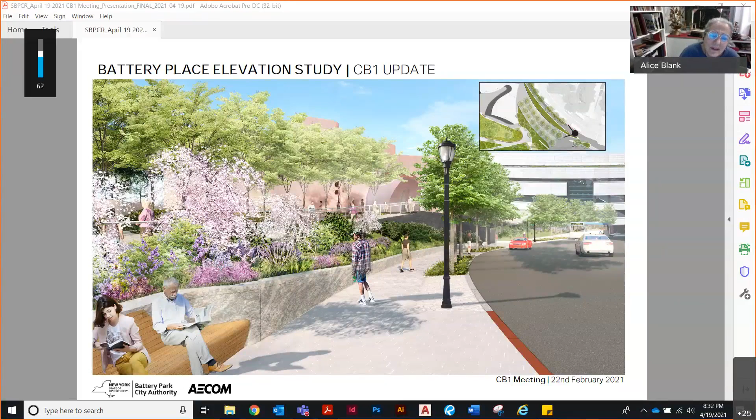All I'm trying to do is understand. I'm not talking about the elevator at the moment, I'm talking about the appearance of that portion of the pavilion, and I'm trying to understand if there's anything else that can be adjusted. I understand you don't have time.

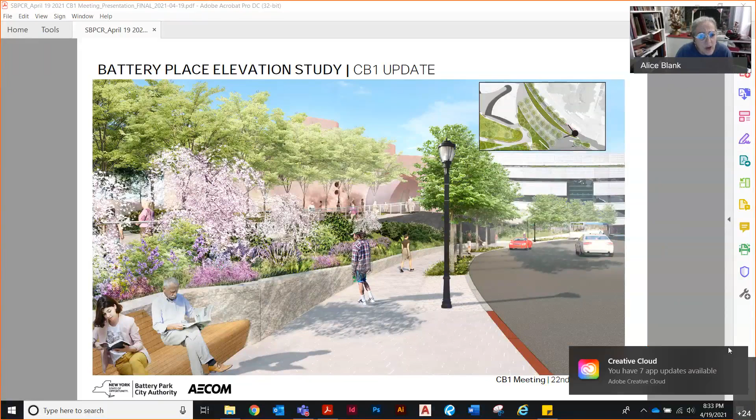So if I can just go to Warrie Price, if I can ask her, because I think she was on earlier, and I know, Warrie, you were very kind in coming to the Parks Committee and speaking up about the walls. No one knows the battery better than the person who basically created it. So I don't know, Warrie, if you feel comfortable saying anything about the battery entry area, or any advice or recommendations as this goes towards its final iteration in front of the PDC. We would welcome your voice on that.

Are you there, Warrie?

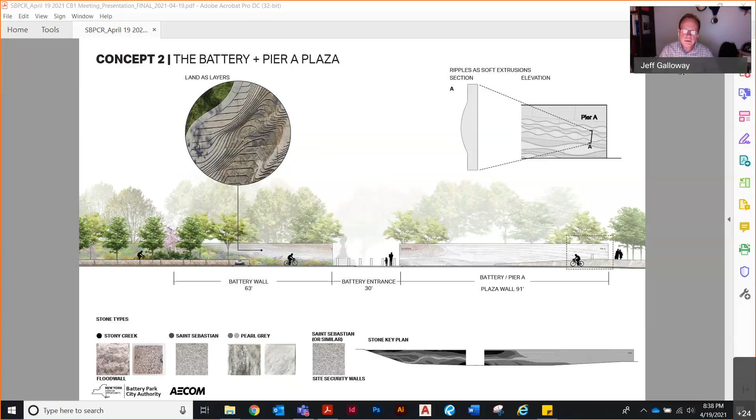The design flood elevation, did you say that was 18 feet, or was it some other? It actually varies depending on where you are, based on how close to the waterfront you are, and what's in between you and the water itself. So at the wall location we've been talking about, for instance in Pier A Plaza and across the tunnel, the design flood elevation is at about 18 feet. Okay, and the top of the wall that you're showing there, what elevation is that? Is that 18, or is it some margin of safety above that?

I believe that's at 18 feet. Hogan, is that the top of the wall matches the DFE, or is there a slight build on top of that? The top of the wall does match the DFE. There's the thickness of the veneer that will be added to the top of that, but that's marginal compared to what you're asking about.

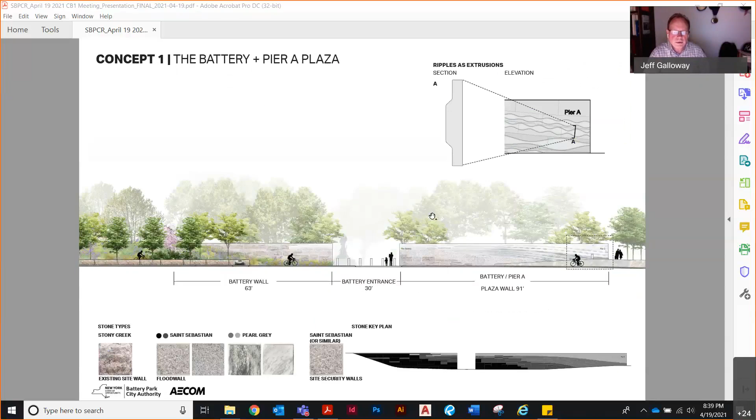And in some of your drawings, there was an indication of a 2-foot margin at the top. I didn't understand the significance of that 2 feet. Why was that noted on those renderings? I'm not sure which one specifically you're asking about. Yeah, keep going back. Oh, this here. That's just to indicate the location of the signage in relation to the top of the wall.

I see. Okay. And did I understand you to say State Street doesn't need a wall because it is at 18 feet elevation already, or is the DFE lower than that at State Street? The DFE, by the time you get up towards State Street, it actually drops to about 15 feet. So we hit natural grade right where the entrance to the park is.

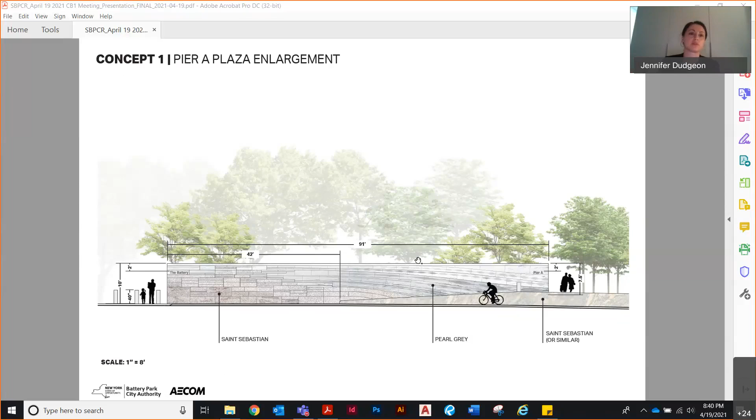Unfortunately, this deck wasn't one that was specifically discussing the battery, but when you get to the corner of State Street and Battery Place, there is a landscape island, and then there's paving that wraps around either side of it. So we're tying it to grade in and around that landscape island.

Okay, and at some point in the presentation, on the right-hand side where the bike path runs through, there was mention that that had been reduced from 45 to 30 feet. What was the reason for the reduction? Based on feedback we received last time, there was concern that the width of the opening felt too much like a plaza, and that it should feel a little more intimate. So we looked at reducing that width down to essentially what we needed in order to maintain the clear bike lane, and also there is a truck access route through there, and then making sure that felt comfortable still from a pedestrian point of view, and that the proportions in terms of the clear opening to the height also felt comfortable.

Okay. The only other point I'd make is I'd throw in my support for an additional elevator at the Pavilion building near the service entrance. When the slide showing the pros and cons, it looked to me that the cons were relatively minor compared to the pros. And I agree with Wendy's concern that if I'm pushing a friend or relative in a wheelchair, which I from time to time do, that long ramp might be something of a workout that I might want to avoid. And although I think it might actually hurt the aesthetics at an aesthetically challenged location already, I think it certainly would help the functionality. That's all.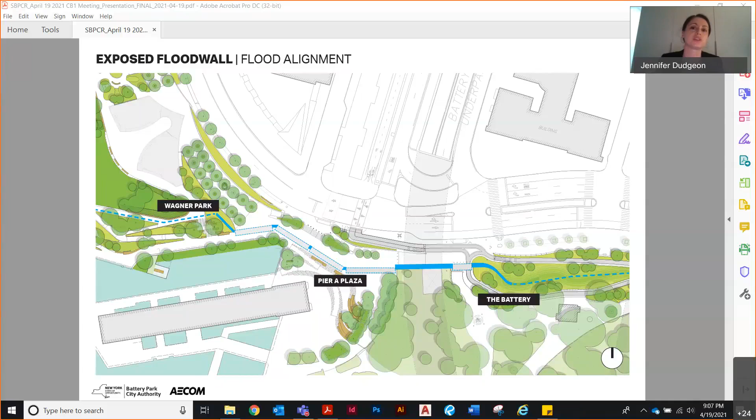I didn't follow that, so I'm going to ask Nick if he'd be good enough to write an email to the board that defines what all that is. But just to confirm, are the images the same in their presentation as we received tonight, except for the additional flood wall? The only materials going into the PDC submission relate to the flood wall; what you saw were two concepts still in progress, to give an indication of direction. So could you share with us the final concepts prior to presenting to PDC, so the board could look at those? Is that possible? Sure, that's great, yeah, can send that to you.

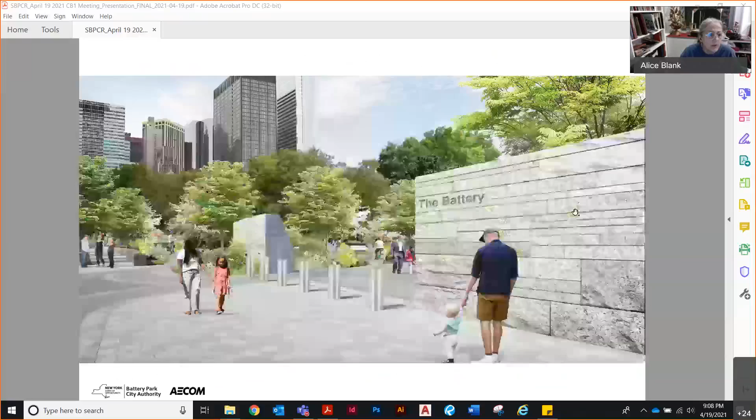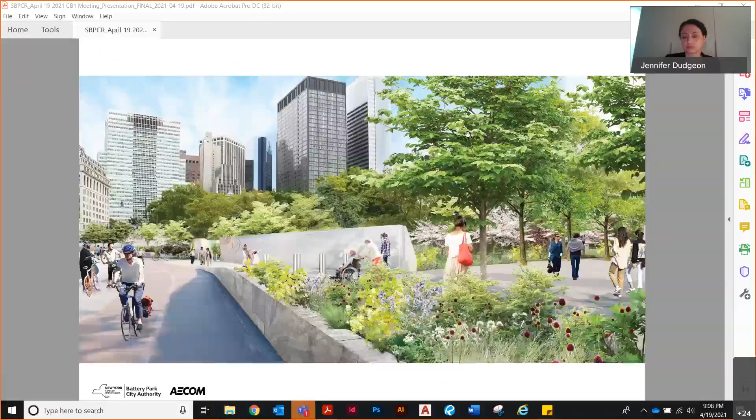So with the exposed flood wall, could you go back to the three-dimensional perspective that shows the actual flood wall. I'm curious, do you have any views looking north from the back of the wall - or the front, if you're in the park. Are there any views going in the other direction, showing the wall from south looking north? No, we don't have that today. Seems like an odd thing not to include, since that's a pretty critical view. I also can't quite understand the wall - in this angle it looks thinner at the top, thicker at the bottom. How thick is it? It looks very thick further down. I didn't see sections indicating the thickness.

Alice, you're correct - the back of the wall is battered, narrower at its top, tapering upward. At the base it's about 5 to 5.5 feet wide. That dimension is defined by the structural beam and footing necessary to elevate over the underpass. At the top, it narrows down to roughly 2.5 feet wide.

I think it's something everyone should see - it's a 90 feet wall, the size of a New York City loft, quite a huge piece of construction. I think we should see all sides and aspects, but it struck me that it almost looked like a seat of some sort. Was there any thought about incorporating seating or something else to make that wall more than just a wall, as people are calling for art and such? Was anything addressed on that backside - seating, or some sense of where that width comes out, planting that people are calling for, or any other use? It just is, given its shape.

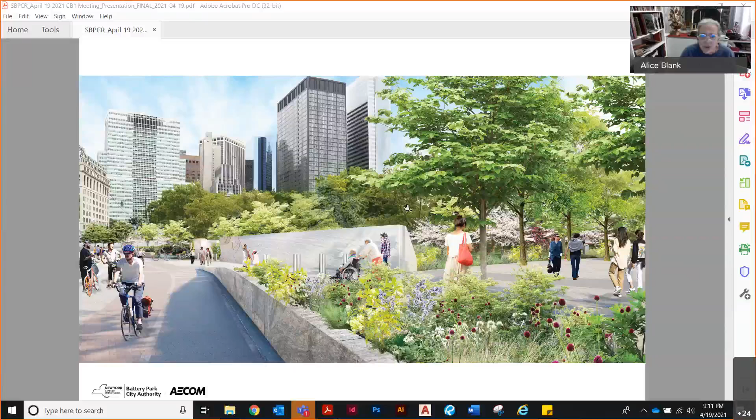Could you just show a shot of the columns again? I wasn't quite sure, we have 4 of these columns. The scale here was a little hard for me to appreciate. In the close-up, there are no dimensions noted, but it looks like the woman is either 10 feet tall or something doesn't match. Your small version on the left, the scale of the man standing next to a column is very different than this woman here. It just doesn't look right. What is the scale of the column, I guess, is the question. That's a good question.

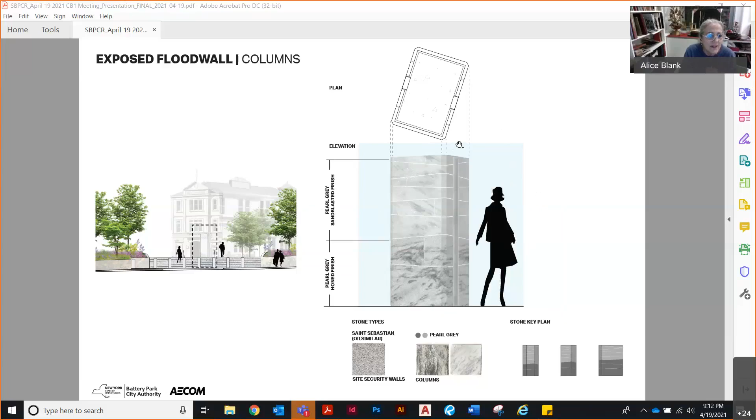The columns are all about 7.5 feet tall. So the woman, she's not 10 feet tall, she'd actually be roughly 5'10", 5'8". Well, you understand my point, if you go to the left he's like half the size of it. So something didn't jive.

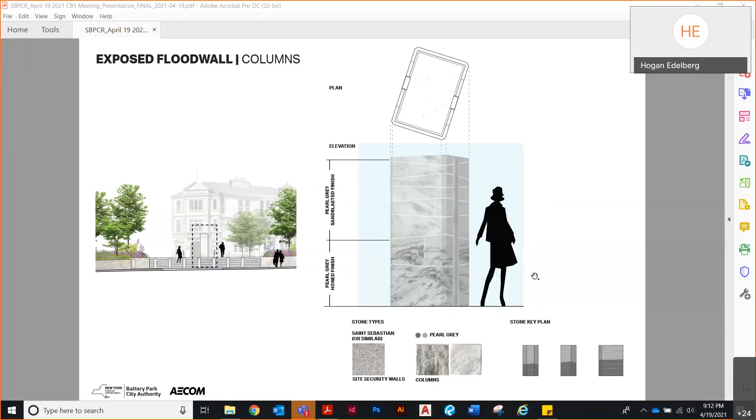But the width of these, they seem to be different shapes, all of them, right? They are different shapes, the widths vary. I'm going to switch to the plan because it's easier to explain looking at the plan. As you can see, the shape of the columns needs to create the negative space between the direction of the gates. So we worked to clad these in a way to reflect the dynamic nature of the footprint of the columns. The shape of the columns varies basically as you move across the plaza.

It's really hard to know what's going on there, both in terms of the plan, the section, elevation, without dimensions, without perspectives on all 3. But anyway, it seems like it's a fait accompli.

Another question: is there an additional wall to it going into Wagner Park, right? Like a 12-foot, 9-foot high, 12-foot long wall or something? It'll be also 7.5 feet tall, slightly maybe 8 feet tall, and it extends into the wall into the park. As it extends to the north, this is where we have the planted slope sloping up against it, so it quickly disappears into Wagner Park. But roughly, from the smallest point here to where it's exposed, I'd say it's about 20 feet maximum. Not nothing, okay, I just wanted to make sure we understood it all.

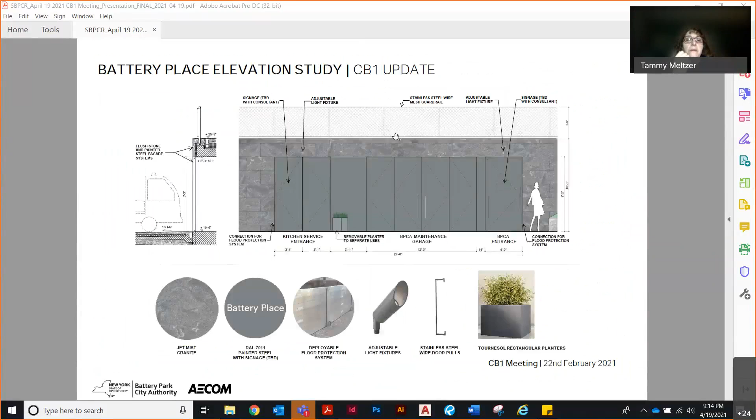Are you willing to leave the full deck for the community to be able to absorb? Do we have a copy of this, Diana? Yes, we do, and it should be posted on our website tonight.

So if you could give us more of the flood wall and the back of the flood wall and the section of the flood wall and the columns in this section. If this is 95% done, one would assume you have all the architectural construction documents pretty close to done, there must be all of that available. It'd be great if you could allow the public to be able to see that.

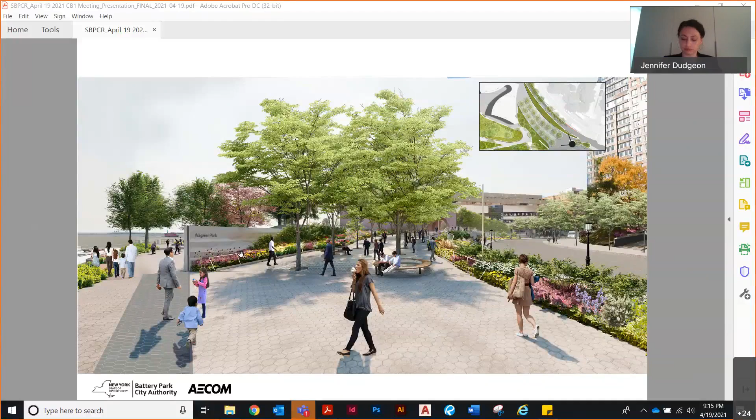Alice, would you prefer that we integrate that into one PDF and then issue that to you in one go? That sounds good. Okay, oh, I'm just getting a question here on my email.

Someone wants to know, Lori asked if you can reverse the wall so the batter faces the street. It's an interesting question. We did have an option at one stage that did that, and as Hogan mentioned, I think there were some discussions with our partners regarding the scaling of that wall, and the preference was to deter scaling along that length. So that's where you made a decision.

Okay, well, I guess as one of your partners, some folks would like to see that further thought about. But okay, although my questions are answered, I think we had the question going back to the sustainability of the building. Bob had asked about Passive House. So Bob, I don't know if you want to elaborate, but if somebody could speak as to whether Passive House was looked at, that was your question, right, Bob?

I just want to mention a couple of things about budget, just really quickly. One is that Pier A has been a restaurant for a while, and at the beginning, years ago, the first controversy about Wagner Park had to do with building a restaurant there in the first place, and the community board rejected it, and here we are ending up with a restaurant, but sponsored by the Battery Park City Authority. At the same time, Pier A wasn't able to be financially viable.

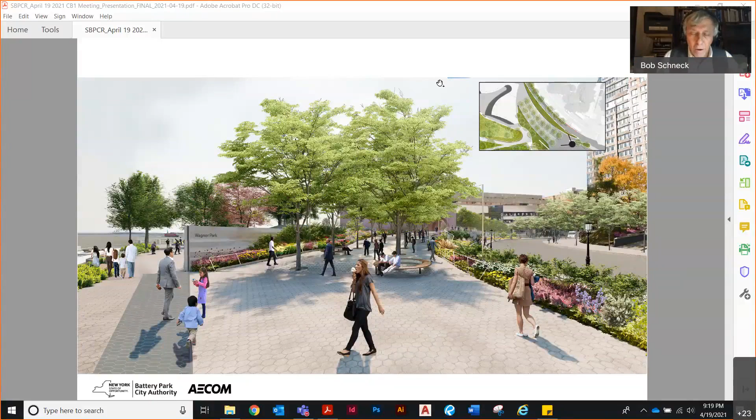Some really big issues are, if you really want to move ecological construction forward, it's very important that that become code in the state of New York. Passive House is working closely with ASHRAE, with HERS, and with LEED to come up with ways to approach code making in New York that's easy for the code keepers to work on site. So programs are being developed that make that possible.

The next thing is that Passive House plus LEED more than equals wherever the carbon zero standard is. If you take all of the things that LEED does and add in the passive house package as their energy saving solution, you get a package that's not only much bigger than zero carbon, but also already accepted around the world and around the country.

The next important thing that just came up is that in working on the budget for the state of New York, REBNY tried to put an element into the governor's executive budget that made it possible for big real estate owners to invest their money however they wanted without any controls, and they wouldn't have to improve their buildings. That was something Passive House was very involved with resisting, along with lots of other construction elements in the city, including the unions.

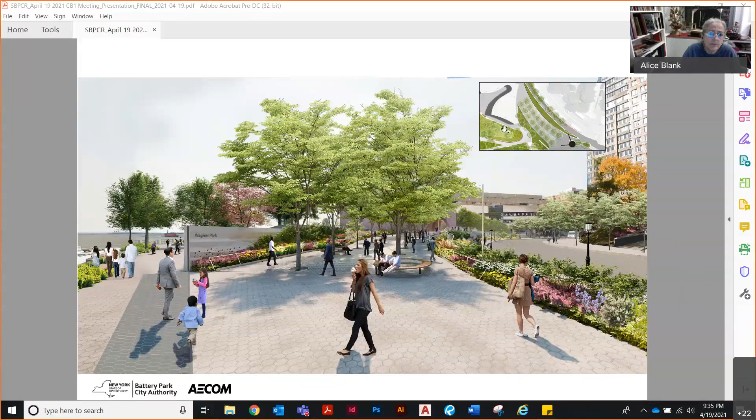Q1 of 2022. We'll get into that, but the conversations that were had when the wharf project was discussed with Battery Park City Authority present was that the Battery Conservancy and the Battery would not be fully closed during the work you're doing. You'd obviously have to close off the construction areas, but there would be access to the waterfront around Pier A. That's a level of detail that hasn't been fully fleshed out yet.

That's something the public should know. We kind of want to get that going pretty soon too. Yes, agreed, it definitely needs to be discussed.